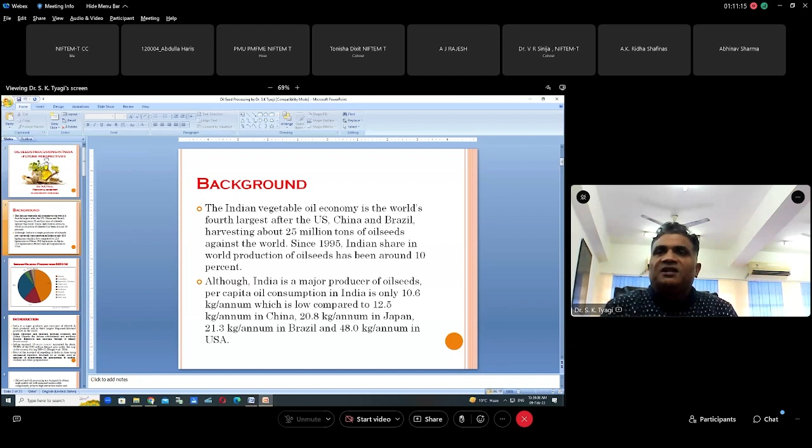Even in Pakistan, the per capita consumption is more than us. In Indian oilseed production, on a 2013-14 basis, 44% is soybean, then groundnut, and 29% is mustard or rapeseed. In northeast or northern India, people like to consume mustard oil, and in central India, people like to consume soybean oil, and in Karnataka, Maharashtra, and that region, people consume sunflower oil, and in coastal areas people consume coconut oil. So our requirement is much more than what we are producing, so we are importing oil from other countries. There is always a shortage of oil in India.

India is a major producer and consumer of oilseeds and their products, and is the third largest rapeseed mustard producer in the world. Major rapeseed and mustard growing countries are China, Canada, the Indian subcontinent, and Northern Europe. Rapeseed and mustard belong to the family Brassicaceae. Indian mustard accounted for about 75 to 80% of the 5.92 million hectare area under the crop in the country during 2011-12. Most of the mustard oil expelling in India is done using mechanical expellers. Mustard oil is widely used as a medium for preparation of pickles, chutney, and other preparations.

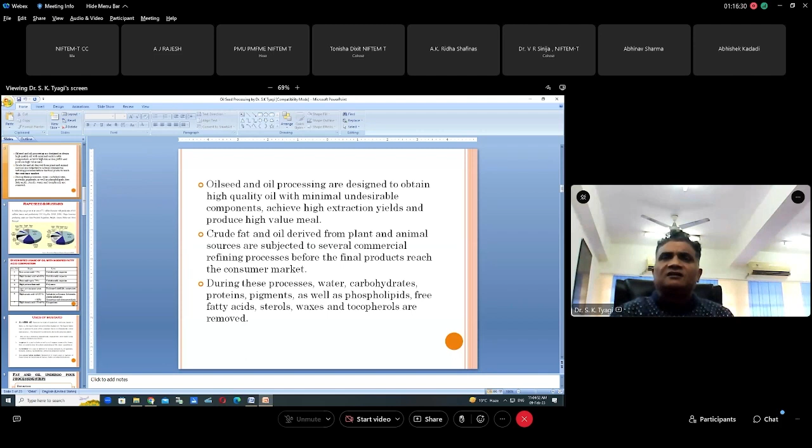I will also discuss the shortcomings, advantages, and disadvantages of extraction through solvent extraction. Suppose we are talking about rapeseed and mustard.

In India, around 7.3 million hectares and 6 million tons, with productivity around 931.5 kg per hectare, are obtained in Uttar Pradesh, Rajasthan, Punjab, Assam, Bihar, and West Bengal. So this is the statistical representation of the production of rapeseed and mustard in India.

As a thumb rule, the diversified usage of oil with modified fatty acid composition: zero erucic acid oil is one having less than 2% erucic acid, and its use is nutritionally superior. If it has high linoleic acid, around 40 to 50%, it is also said to be nutritionally superior. If oleic acid is up to 70%, this oil is also nutritionally superior.

High linoleic acid, up to 40 to 55% or greater than 80%, is used for industrial polymers, lubricants, plastic industries, cosmetics, and pharmaceuticals. High stearic acid is used for margarine. So there are many uses, some industrial, some edible purposes.

During refining, we extract some byproducts, and these byproducts are used as raw material for making certain other industrial products.

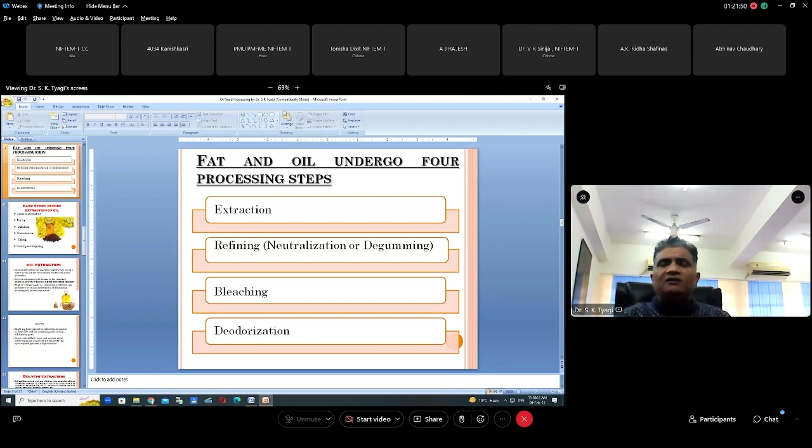And for this, either we have to produce much more oil seed in the country, or we have to go for a very special treatment of the oil that is fit from a health point of view.

Basic steps before extraction of oils are cleaning, drying, dehulling, size reduction, flaking, cooking and tempering. It depends from seed to seed. Suppose we are going to extract the oil of groundnut, then we have to give some heat treatment prior to extraction, and different types of oil seeds need special treatments for extraction of oil in a better way.

Oil extraction: solvent extraction and mechanical extraction are two common oil seed extraction processes, and in many places a combination of these two is used. If the oil content is more, first mechanical extraction is done, and then subsequently solvent extraction is done. If the oil content is low, we can go directly for solvent extraction.

From a theoretical or academic point of view, the supercritical carbon dioxide extraction method is also used, but it is used for oil seeds with very small oil content, like turmeric oil or mango kernel oil. So for extraction we can go for supercritical carbon dioxide extraction technique, but this is very costly and is not used for cooking oil purposes.

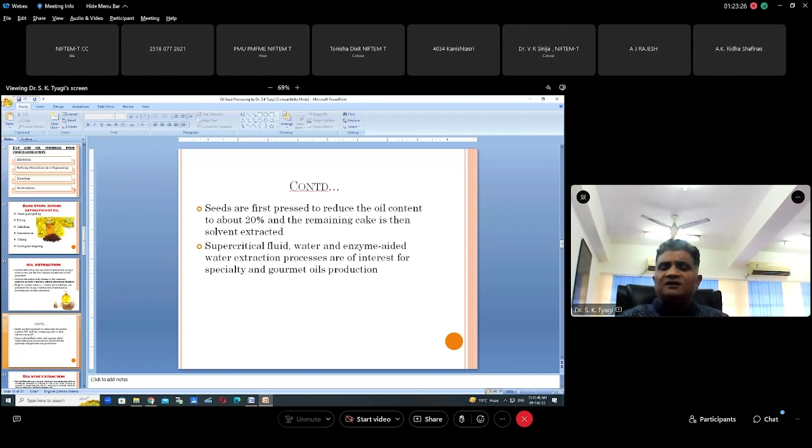On the basis of the seed, we can go for special treatments. That may include some enzyme-aided treatments, some water extraction techniques, some chemical treatments, some steam treatments. There are so many pre-treatment techniques available.

As I have already discussed, solvent extraction is done by either petroleum ether or hexane for different oil seeds. And the refining, as already discussed, is done for removing the free fatty acids, and these are multiple steps, either one step or two steps we have to go for. So I am not going into detail on that.

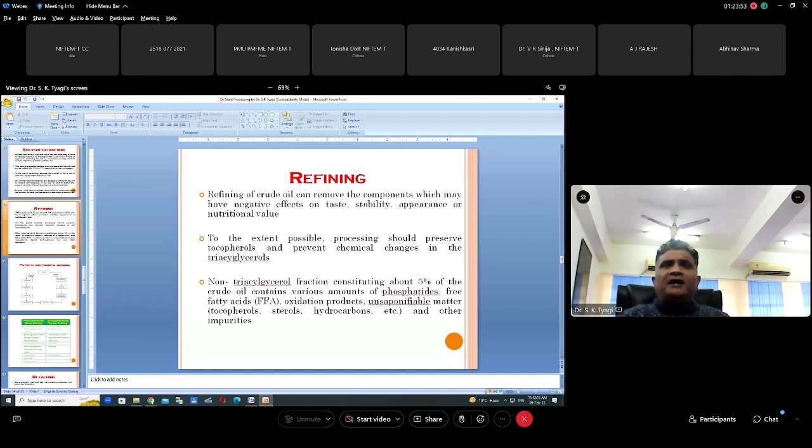There is physical and chemical refining. In chemical refining, we treat it with alkali, and in physical refining, we go with steam treatments. On the basis of temperature, we can remove so many aromatic compounds, and that is in the form of degumming. This step, physical refining, is nowadays more accepted, so that we at least get rid of one step of chemical treatment.

Physical refining, or steam refining, is one part; chemical refining, or caustic refining, is another. So we can have the comparison of these two: in degumming, removing phosphatides through enzymes here, and degumming with the help of phosphoric acid there. Then bleaching, that is color removal through activated bleaching earth.

Neutralization with caustic is done for removal of free fatty acids. This is followed by dewaxing, filter pressing, and bleaching. In steam deacidification, free fatty acids are also removed.

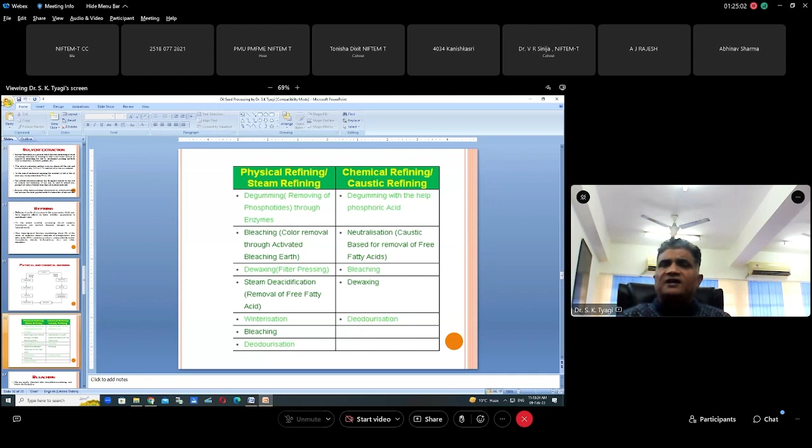This has also been discussed. Dehulling of mustard seed is one of the operations. This mustard oil is preferred for its pungency and is much liked by people in the northern and northeastern parts of the country because of the presence of hulls in the seed coat, which imparts color to the oil and also a major part of pungency due to bitter compounds present in it.

A need has been felt to dehull the mustard seed before extracting its oil. This technique was developed at CIPHET Ludhiana. Here we remove the hull first, and it has been observed that after dehulling the seed, it is possible to convert the non-edible oil cake, mostly used as animal feed, into an edible one, and also derive many other byproducts from the cake. It was considered desirable to develop a low-cost, low-energy process for dehulling the seed.

We worked on that and obtained several patents for dehulling the mustard seed. We extracted this bittering compound from the mustard seed and developed many products with it, and now many of them have been commercialized and are very much in the market.

If we want to reduce the cost of the oil, we have to focus on the byproducts obtained from mustard and other oilseed extraction techniques. If we can develop innovative products from the byproducts of the refining process, only then can we provide a cheaper version of oil to the country's people, and that would be a breakthrough. That is the requirement of the hour.

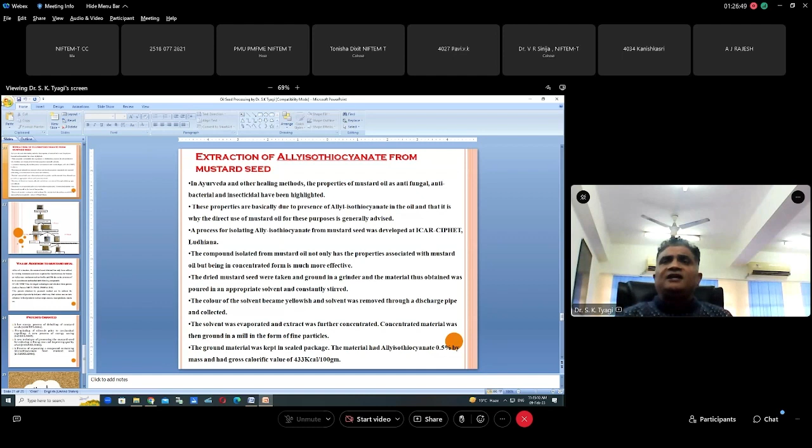You can see at the top the whole mustard seed, which we ground. Then we separated the mustard hull from this and obtained dehulled mustard powder. We got our first patent on this, developing a technique to dehull the mustard seed and remove the mustard hull.

From dehulled mustard powder, we extracted mustard oil and allyl isothiocyanate, and produced de-oiled, defatted, dehulled mustard flour having 47.8% protein. We got a second patent on this, and a third patent for extraction of allyl isothiocyanate.

From the de-oiled, defatted, dehulled mustard flour, we obtained a protein isolate that is 99% pure, a hydrolyzed plant protein. We developed biscuits, breads, and various other food products with this de-oiled, defatted, dehulled mustard flour, which is now very much in the market and a very famous product.

We published a paper on this, which has very good citation in the world. Also, after extracting the protein isolate, we extracted fiber from this de-oiled, defatted mustard flour.

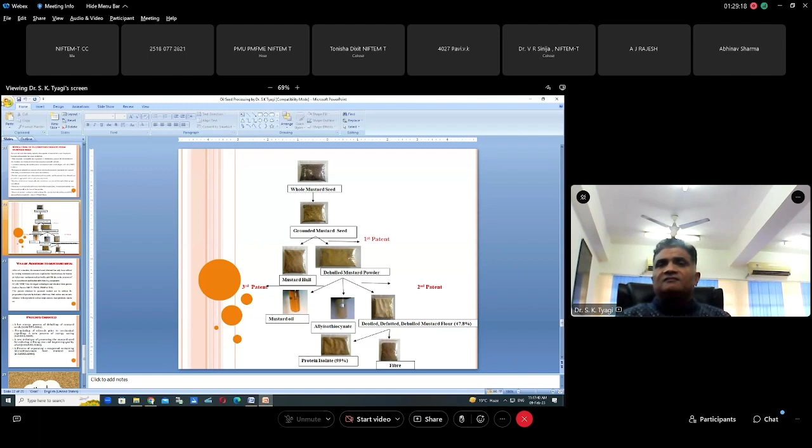So nowadays, friends, it is time to focus on value addition, to develop innovative products from the byproducts obtained during refining or extraction of oils. The time has gone when we just used oil as such and the cake only for animal purposes. We have to focus on developing innovative products from the byproducts obtained during the refining process. This is the requirement of the hour.

After oil extraction, the mustard meal obtained has only been utilized for feeding ruminants and is not exploited for food or feed uses for humans and non-ruminants such as broilers and fish, due to the presence of toxic constituents and undesirable bittering compounds.

ICAR-CIPHET has developed technologies and obtained three patents on this. The protein obtained by this patented method can be utilized for preparation of protein hydrolysate, which may find various uses as a taste enhancer in food products such as soups, sauces, meat products, snacks, etc.

We obtained these 4 patents. One is low energy process of dehulling of mustard seeds, pre-grinding of oil seeds prior to mechanical expelling - a new process for energy saving, a new technique for processing mustard seed for reducing refining cost and improving quality of oil, and a process of separating a compound containing allyl isothiocyanate from mustard seed. So these are the things which we have done so far.

With this, I hope that we can focus on other oilseeds also, because there are so many innovative products that can be developed even from cottonseed oil. Cottonseed is mainly used for making bakery products. In bakery products, cottonseed oil is used because it has no grease type of materials - it gives crispiness to the bakery products.

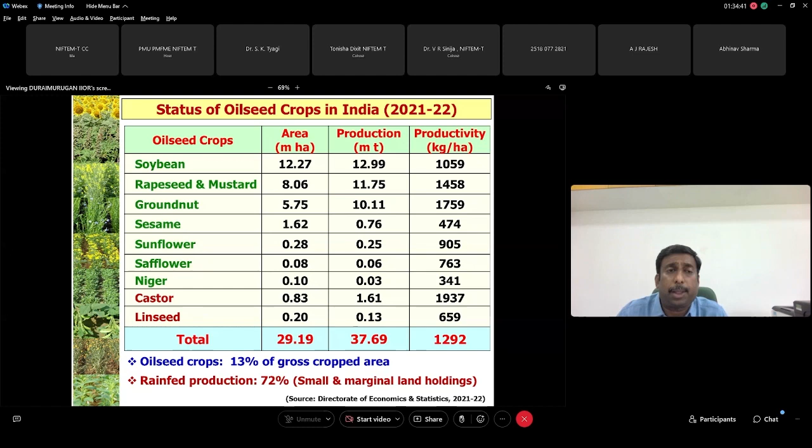These 9 oilseed crops are cultivated in about 29 million hectare area with a production of 37 million tons. But 72% of these oilseed crops are cultivated under rainfed ecosystem, especially by small and marginal land holdings, so productivity is very low - about 13 quintal per hectare compared to cereal crops. Looking at production contribution, only 3 oilseed crops - soybean, rapeseed, mustard, and groundnut - contribute 89% of the production.

Looking at different states contributing to oilseed production, only 4 states - Madhya Pradesh, Rajasthan, Maharashtra, and Gujarat - contribute almost 75% of the production. In addition, groundnut and sesame seeds contribute a large share in exports. Annually, we earn foreign exchange of almost 9,000 crores. This is the status of oilseed crops in India.

Coming to post-harvest losses, which includes from harvesting operations to storage - based on recent reports and literature, post-harvest losses, including storage losses, range from 2.3 to 10% in different oilseed crops, which is equal to almost 2.2 million tons. Based on the latest production and minimum support price, we calculated the economic value, which was found to be almost 10,000 crores.

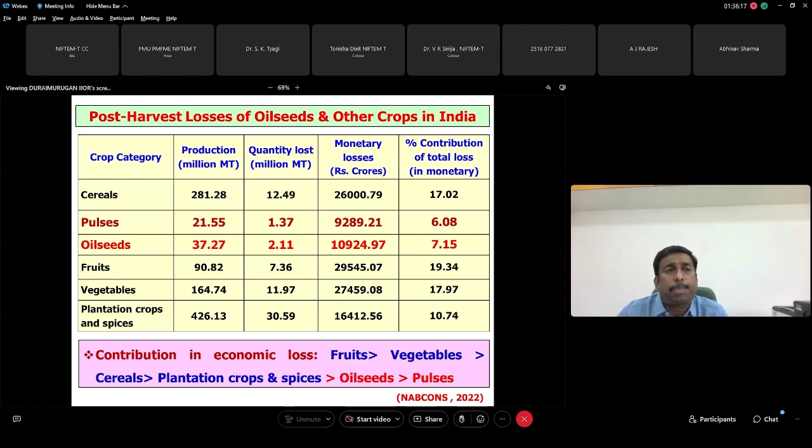This is the post-harvest losses occurring in oilseed crops, including storage losses. Based on NABCONS report, post-harvest losses in oilseed crops are lower than cereal crops and horticulture crops, but higher than pulses, so we have to focus more on oilseed crops as compared to pulse crops. Looking at losses occurring in different post-harvest operations at the farm level, from harvest to storage, the major contribution is from harvesting, threshing, and collection, followed by cleaning and storage. Storage contributes 0.22% of the total post-harvest loss of 4.26%, meaning almost 5% losses occur in post-harvest operations.

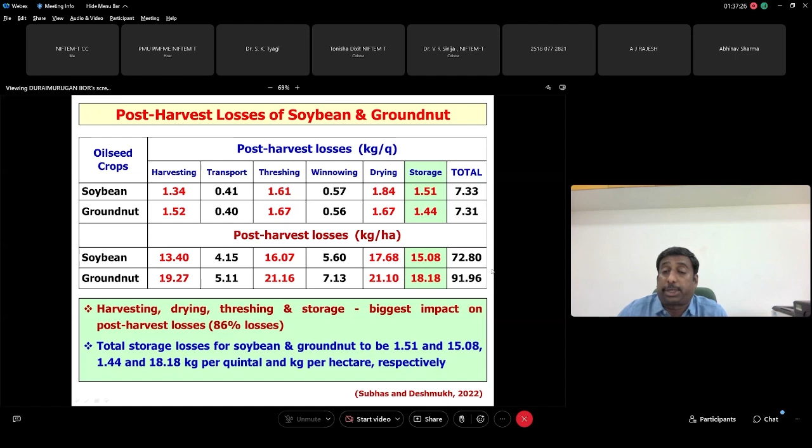This is important in case of oilseed crops. In one of the recent research papers, you can see especially soybean, groundnut, and sesame are highly susceptible in storage conditions, and there are a lot of losses occurring during storage. Almost 1.5 kg of soybean and groundnut seeds are lost per quintal, equal to 15 kg per hectare of soybean and 18 kg per hectare of groundnut. This is the biggest impact among the post-harvest losses in these three oilseed crops.

So what are the reasons, the causes of storage losses in these oilseed crops? There are almost 6 insect pests and mold growth, which are major factors contributing to the post-harvest loss, including storage losses, mainly in these oilseed crops. We will see one by one now.

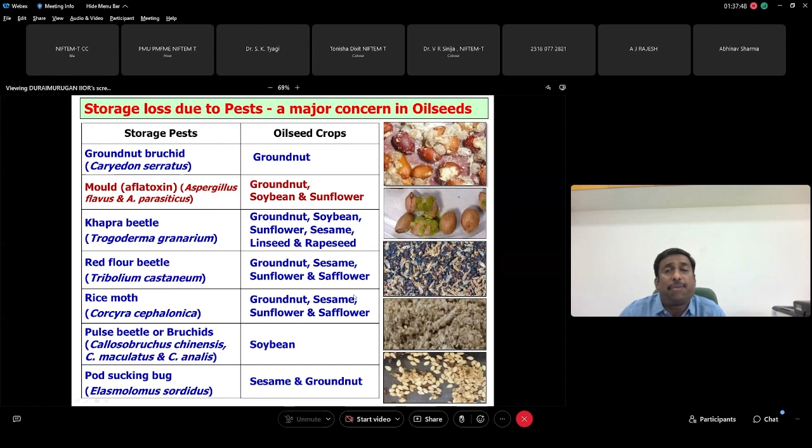If you see the groundnut crop, 65% of the produce is stored up to 9 months, either as unshelled pods or kernels, by the farmers, especially for seed purpose, for the processors, for oil extraction and confectionaries, and similarly by the exporters for export. In many cases, a storage loss of 10 to 25% was reported, especially due to insect pest and mold growth, and also due to rodents.

In addition, there are many export rejections, especially in groundnut, because of infestation due to groundnut bruchid and aflatoxin contamination. The groundnut bruchid is a serious storage pest of groundnut, not only in India but in other parts of the world also. It damages both the kernel and the pods, feeding on them internally, which results in increase in temperature and moisture, which favors the growth of aflatoxin. Secondary pests like rice moth and red flour beetle also cause this damage.

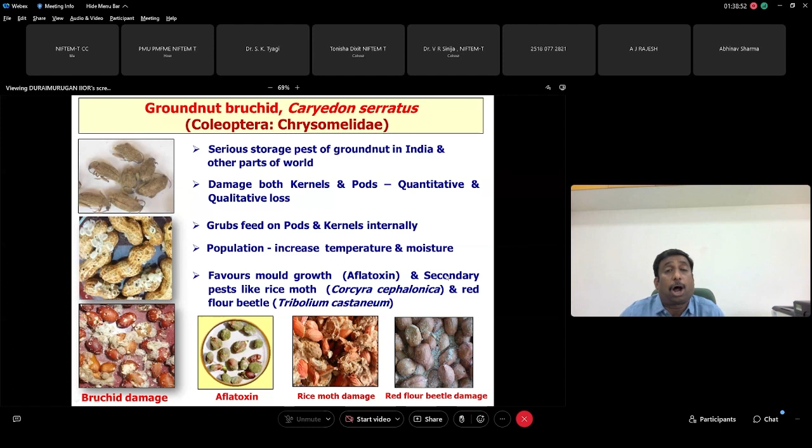Another important one is aflatoxin contamination in groundnut. Though it occurs in other crops also, it is a major problem in groundnut. These aflatoxin producing fungi, Aspergillus flavus and parasiticus, colonize and contaminate the kernels. These contaminations occur especially during the pre-harvest time, field drying time, curing time, or during storage time. It leads to deterioration in both the quantity and quality of the groundnut, and also its products like oil and cake, which is highly harmful to human beings and also for animal health when the cake is fed to the animals.

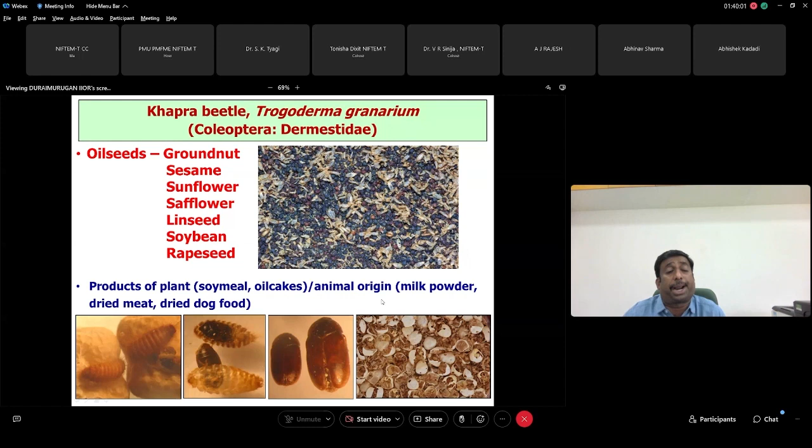Another important pest is the khapra beetle, especially in North Indian Peninsula. It's a major problem in almost all crops, from groundnut, sesame, sunflower, safflower, linseed, soybean, and rapeseed mustard. This causes export rejections due to the presence of this insect pest in mustard. In addition, it also attacks products like soya meal and oil cakes. It's a general feeder that also attacks milk powder, dried meat, and dog foods.

Another important one is the red flour beetle. In recent years, especially in sesame, we are recording more damage due to this pest, especially in white-seeded sesame. As compared to black and brown seeded sesame, these white seeded sesames are highly susceptible to storage pests, especially this red flour beetle and rice moth. In addition, it also attacks the groundnut crop.

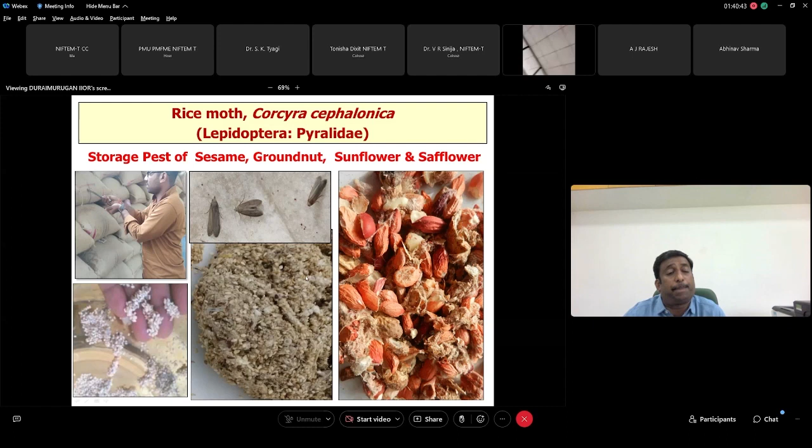Another important problem is the rice moth. It is a polyphagous pest that attacks many cereals and other crops, including oilseeds. It attacks sesame, groundnut, sunflower, and safflower. You can see the damage here. Especially in recent years, there is a lot of damage in white seeded sesame by this moth.

Another important one is the bruchid, also called pulse beetle. In addition to pulses, especially in soybean, it's a major problem and it damages the entire produce, sometimes up to 100% damage under favorable conditions. That produce will not be suitable for seed purpose or for consumption by human beings and animals. So this is also one of the important pest problems during storage.

In recent years, we are getting more problems, especially due to the sesame seed bug, also called pod bug. This is the pod bug. You can see here, this is sesame seed harvested and occurring in the threshing floor. These are the bugs, you can see how many numbers of bugs are damaging the seeds. It causes both qualitative and quantitative losses, leading to reduction in oil content and also weight loss. In some cases, it also attacks sesame and groundnut.

Not only in the threshing floor, even in harvesting and after storage, insects attack the sesame and groundnut crop, leading to shriveling of the seeds which become unfit for consumption, and the oil content is also reduced. This is another major problem in storage.

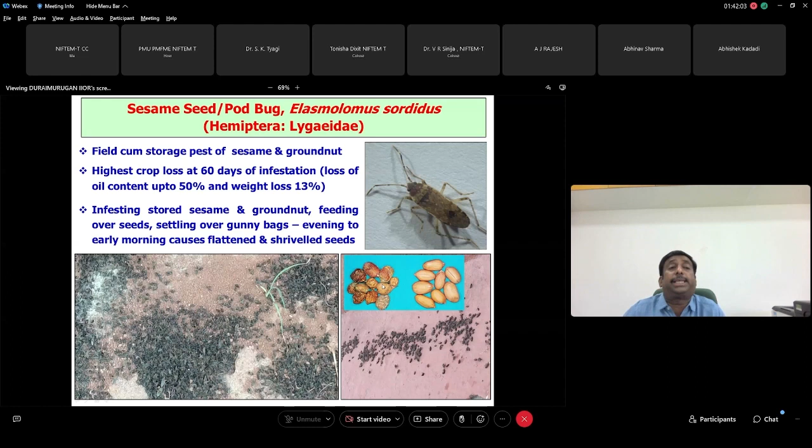So now we have seen the reasons for the problems, what are the problems in storage. Now we are going to the technology to reduce the storage losses in oilseeds.

Especially, most of the storage problems initiate from the field. So we have to take care of the field operations, especially harvesting. Harvesting at the right time, at the right maturity stage, is very important in oilseed crops. And especially during harvesting, we have to avoid damage to the pods, which leads to a lot of contamination by insect pests and also mold growth.

So we have to avoid heaping the produce in the field, especially for long days, as that will cause a lot of insect infestation and mold growth. Similarly, the harvested produce should immediately be dried properly. For example, in groundnut, you can use the inverted windrow method immediately.

Similarly, especially for groundnut, heaping near the alternate host should be avoided. So immediately after harvest, it should be properly threshed, dried, and packed. Otherwise, the alternate host, especially groundnut bruchid, contaminates from the trees to the harvested groundnut produce.

Similarly, avoid carryover of pests from the field, like pulse beetles, pod bugs, and the painted bug in mustard, especially rapeseed mustard. This carryover of pests from field to store means even less than 1% damage in the field can cause 100% damage in storage. So we have to take care of proper management practices at the pod maturity stage of oilseeds, which will greatly reduce the loss in storage.

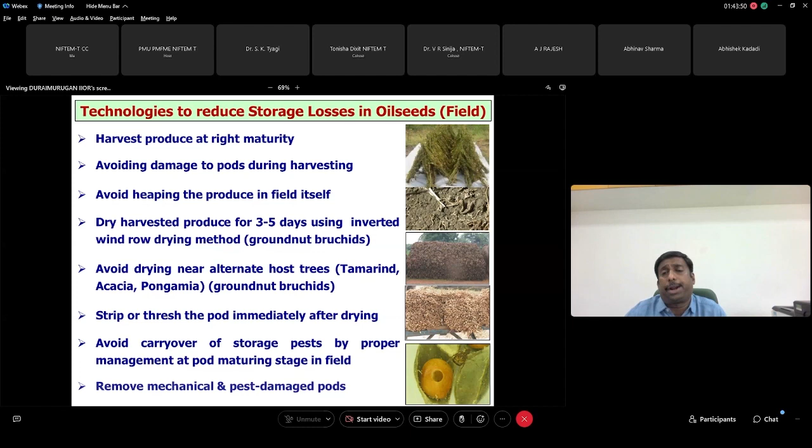Actually, compared to other crops, manual harvesting and other operations are more common in oilseeds, which causes a lot of damage to the pods. The mechanization level of oilseed crops is only 20 to 30%, based on the latest report. Harvesting and threshing in oilseeds is only 20 to 30%, as compared to 80 to 90% in cereals.

So we have to encourage mechanization in oilseeds, especially combine harvesters, which are commonly used in crops like soybean, safflower, sunflower, and now even mustard has been recommended. These combine harvesters, threshers, and dryers should be encouraged among farmers, which will greatly reduce the loss in storage conditions.

Similarly, the major problem of insect pests and other quality or quantity loss in storage is due to inadequate drying. This is very important. Inadequate drying leads to insect infestation, fungi, moisture, which results in overheating, discoloration, and complete deterioration in the quality of the oilseeds and their products.

So we have to use dryers. There are several solar-operated dryers available nowadays that can be encouraged among farmers to reduce the moisture content in the harvested products.

Similarly, for groundnut kernels and pods, 4 to 6% moisture is recommended for kernels, and 7 to 9% moisture content for pods, before storage, and it should be properly monitored. Similarly, for other oilseed crops, less than 8% moisture should be maintained, and we have to remove broken and damaged seeds, which are favorable for the growth of mold and insect infestation. This is a very important practice.

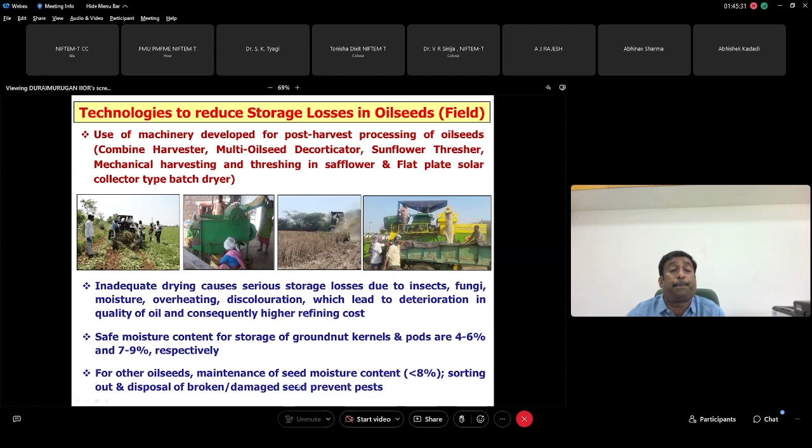So these are some of the mechanization practices we want to encourage. This will greatly reduce post-harvest losses and also reduce storage losses by avoiding damage to the grains and seeds.

Combine harvesters, soybean reaper binders, decorticators, threshers, and oilseed dryers are available. Even solar bubble dryers are available. These can be encouraged among farmers, either on a community basis or village level basis, which will greatly reduce storage losses in oilseed crops.

So coming to storage conditions, what are the technologies? The first important one is the disinfestation of storerooms. Actually, the godowns or wherever you are storing, especially high-risk areas like cracks in the walls and floors and low-light areas, need to be properly checked and disinfected. That will make a lot of difference in reducing losses in storage.

That is a basic step, but it's very important one. Similarly, use of clean storage bags, avoiding the use of very old gunny bags or jute bags, that should be avoided. And if possible you can expose them to sunlight for a couple of days before storing the oilseed. That is very important.

Storing of old or infested stocks in godown along with the newly harvested one creates a lot of cross contamination, so that should be prevented. Whenever storing, we have to allow proper ventilation and space for inspection. That is a basic step that is very important to reduce and monitor the storage loss in oilseed crops.

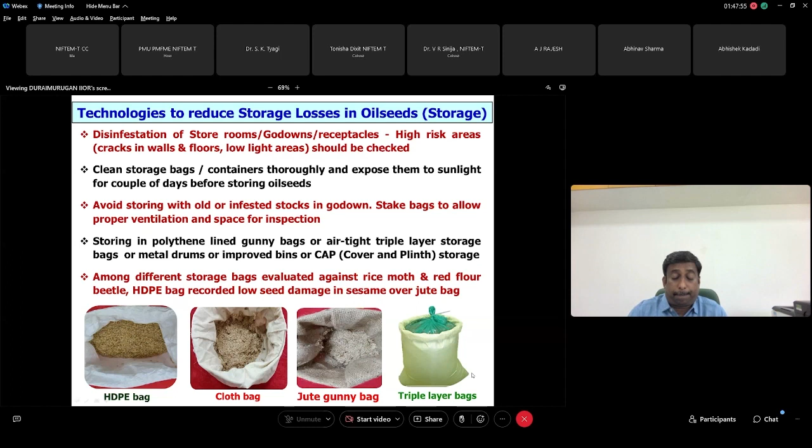Coming to another important one, especially for long-term storage or export purposes, these physical or cultural methods are very important. Nowadays hermetic storage or modified atmospheres are very popular, like super bags, cocoon storage and silo bags. That can be encouraged among farmers and also at the market level channels to reduce the loss in oilseed crops. In addition, airtight storage, sealed structures like super bag, cocoon storage and silo bags are very good in conserving quality and reducing losses due to insect pests and mold growth.

In addition, controlled atmospheres like use of low oxygen and high carbon dioxide are lethal to all insects, which can be promoted for export purposes, especially for storing near the harbors. That will prevent export rejections in foreign countries due to insect pests and fungal growth.

Similarly, temperature control. Temperature plays a major role. The insect pests will not develop below 15 degrees Celsius and also above 42 degrees Celsius. So heating of the seeds to 50 to 60 degrees Celsius for 10 to 20 minutes kills all the pests. This can be followed on a large scale, especially in large bulk storage of oilseed crops used for oil extraction.

Similarly, another important one is regular monitoring and early detection of infestation. Very important. As I told, very low infestation of less than 1% will give potential risk in storage. So we can monitor using it. There are a lot of pheromone traps now available for storage pests, and light traps, pitfall traps, probe traps. Even recently, e-nose detectors are also available that can be used for timely monitoring and management of initial infestation. That will create a lot of reduction in storage losses.

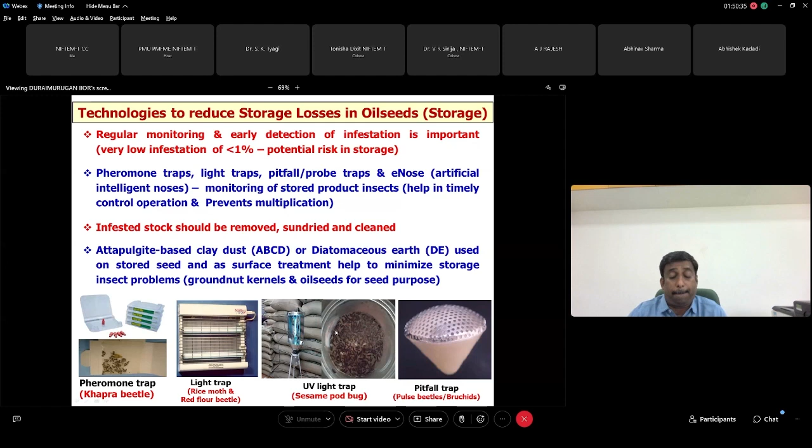Another important one is the use of different edible and non-edible oils, especially at the rate of 10 ml per kg seed, which can be used effectively against storage pests. Especially groundnut pods, when treated with neem seed kernel powder at the rate of 10 gram per kg, or neem oil 5 ml per kg, or pongamia or castor oil 10 ml per kg, or kernels treated with neem leaves 50 gram per kg, are effective against groundnut bruchids.

Similarly, for sesamum, we found that seeds treated with neem leaf powder 25 gram per kg, or neem seed kernel powder 10 gram per kg, or sweet flag rhizome powder, that is Acorus calamus, 10 gram per kg, are effective against stored pests.

This can be used for storing the seeds, especially for next season sowing. There are several biopesticides, especially different strains of BT (Bacillus thuringiensis), that can be used for management of moth pests and also some of the beetle pests.

Whenever you use an insecticide, we should know the label claim of the insecticide approved by the Government of India, and only then should you use it. For seed treatment, deltamethrin is recommended, and similarly for fumigation, aluminum phosphide is approved under the CIBRC label claim that it can be used.

Some of the recently developed eco-friendly biorational insecticides like spinosad, methoprene, and hydroprene are registered as grain protectants in USA, but in India they do not have a label claim. These are all found effective for storage pests. These are biorational, synthetic analogs of natural products that can be used for management of storage pests.

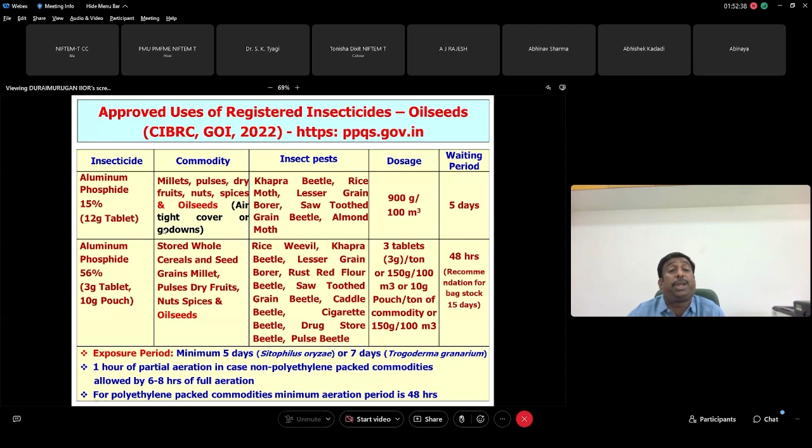This is the CIBRC website. Aluminum phosphide is permitted for oilseed crops, in addition to other oilseed products that can be used for fumigation as per the recommendation by the Government of India, and it may be updated every year by checking the CIBRC website. So only label claim insecticides and fumigants should be used for management of storage pests in oilseed crops.

Fumigation is highly toxic, so it should be performed only by certified specialists. Proper arranging of seeds, creating airtight conditions, and measuring the concentration before and after fumigation is very important. It should be strictly undertaken with a specialist to reduce storage losses in oilseed crops.

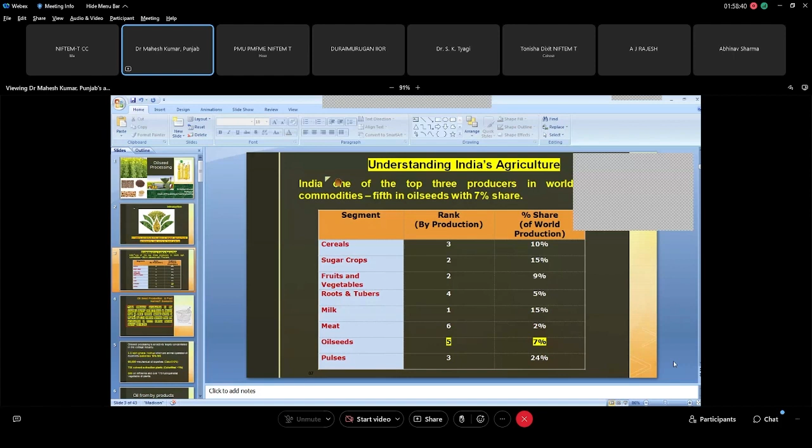So the field is, I will be discussing the oilseed processing as well as the milling machinery involved. We all know, as we've been listening throughout the day, that oilseed is the second largest commodity next only to food grains. If you look at the total Indian scenario, we are very good as far as the production of food grains is concerned in the country, so agricultural scientists have performed marvelously well. But in case of oilseed, our total rank in the world is fifth, with a total share of only 7%. But we are growing.

For the last few years, our production of oilseed has been rising in the country. Can you make it full screen? Okay, ma'am. So now food oilseed production has been increasing as per our demand.

If you look at the scenario of processing in the country, it is more or less considered as a cottage industry. We have a huge amount of ghanis operating in the country, but the oil left in the de-oiled cake is quite high, 15%, with this technology. Even though people prefer the oil extracted through the ghanis, primarily because they consider it as cold pressed oil, the total oil could not be expressed through these units.

Now we have more than 60,000 mechanical oil expellers. It is a better technology than the ghanis, but still 6 to 8% oil is left in the de-oiled cake. Since our country is deficient in oil, that is still very high.

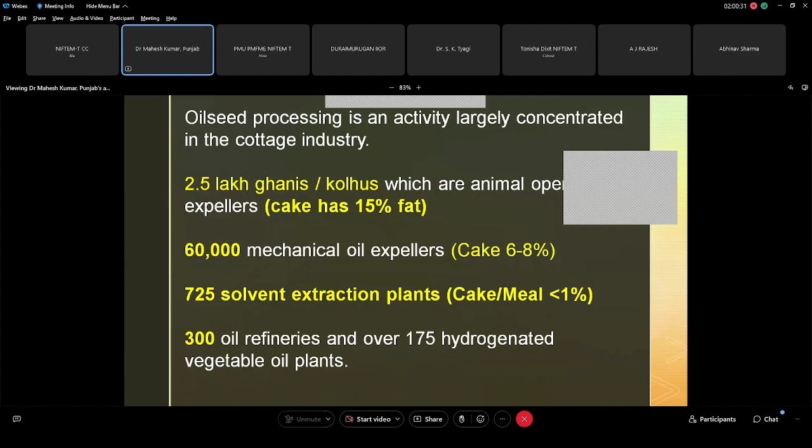So we have to resort to solvent extraction plants using hexane, etc., where the meal or the de-oiled cake has less than 1% oil left in it. Then there are 300 oil refineries and over 175 hydrogenated vegetable oil plants in the country. We also get oil from agricultural processing byproducts like rice bran and maize germ.

As far as the overall situation is concerned, especially in the northern part of India, we give more preference to mustard oil. 90% of the total agricultural production of mustard and rapeseed, including canola, is crushed for extracting edible oil. In fact, two-thirds of the edible oil consumption in the country comes from this category of crop, that is mustard. Canola is a recently developed oilseed variety of mustard, which has less than 2% erucic acid, and its de-oiled cake has less than 30 micromoles of glucosinolate per gram of de-oiled meal, which is a bit of a toxic material.

Physically, oilseed composition can be considered as a mixture of oil, meal, basically composed of proteins, and water. When we talk about processing, this means we wish to remove most of the oil to get the de-oiled cake. The de-oiled cake will contain residual oil as well as some amount of water. But since de-oiled cake is a very good source of protein, it is generally used for animal feed purposes.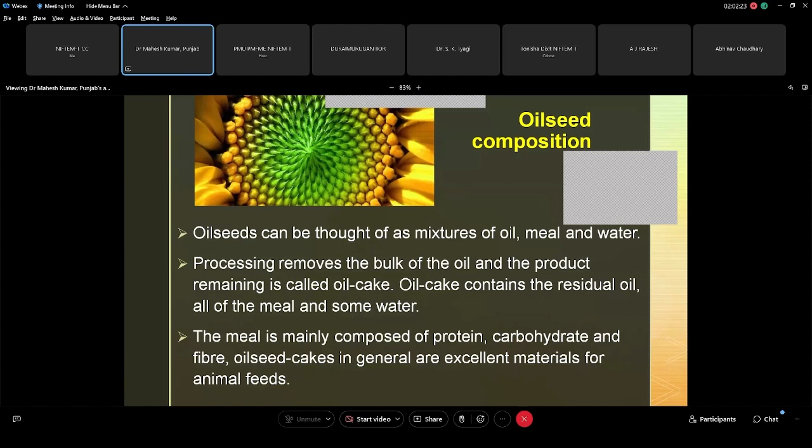Every grain, if it has to be stored, has a maximum moisture content limit for safe storage. Same here also, but we eventually have to store the seeds, whether oilseed or any other food grain, primarily because they are available once or twice a year but needed throughout the year. Moisture content in the oilseed is not only important for storage, but also for expressing oil out of the oilseed. If moisture content is not controlled, there is every chance of microbial growth. So as a thumb rule, when we teach students, we consider 10% moisture content safe for storage of most food grains.

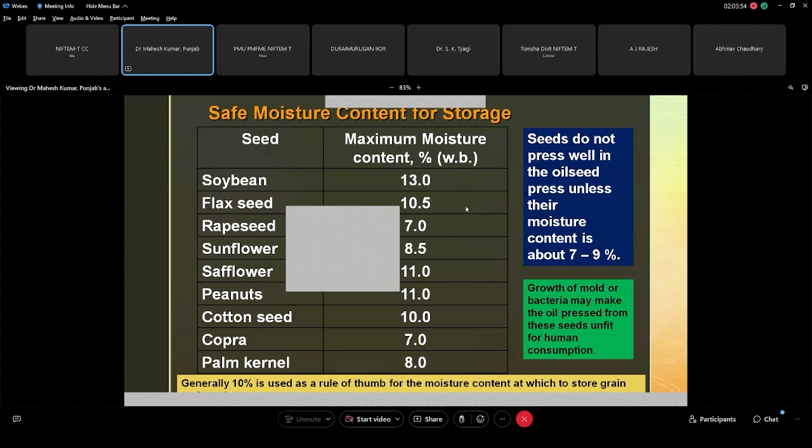But when processing the seed grains for oil expelling, moisture should be 6 to 8, 7 to 9%. Previously, post-harvest losses were discussed for oilseeds, but in case of mustard it is about 9%, which includes losses in the supply chain also. Even though storage losses are not that much, because of handling, transportation, logistics, etc., there are losses in different types of oilseed grains ranging from 3% to 10%.

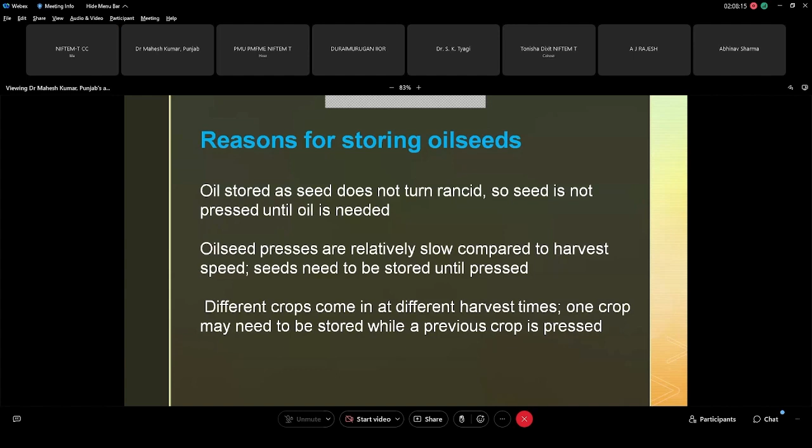Now why do we need to clean? In any processing job, the first step is cleaning, grading, sorting. Weed seeds like argemone, which are present at the time of harvest, may interfere with the extraction of oil during the expulsion process, adding unwanted taste or chemicals to the expressed oil. Moreover, if the seeds are dirty and contain abrasive clay parts or abrasive materials, that will cause more wear and tear of our expelling machine. So there are physical hazards presented by uncleaned grains.

As far as the processing steps are concerned, it is very simple. We need to store the grain. Cleaning after storage or cleaning before further processing is a matter of choice. Some people, when it is stored in bags, clean before operation.

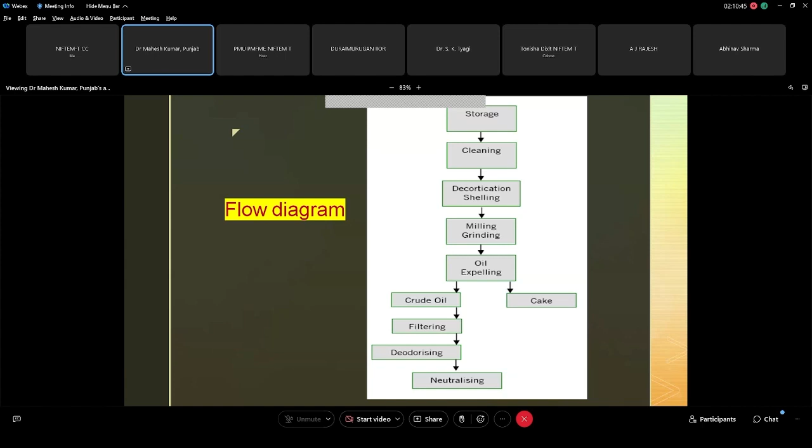Neutralizing means the removal of free fatty acid, which usually is not performed at small scale. There are a number of options available that have been developed over time, starting from the bullock-drawn kohlu or ghanis. Now we have power-operated ghanis, and mechanical expelling units of different capacity.

The amount of oil extracted depends upon the setting of the machine, the screw speed, and the space left between the tip and the barrel itself. So we have adjustable tip diameters and variable speed drives. Both of these, in combination, can give an optimized oil extraction.

One of the important things while extracting oil is that if the oil seed is too dry, we won't be able to get easy and good quantity of oil. The reason could be that the oil mill will get heated up. Usually there is a concept of cold pressed oil, so that purpose will be defeated - we won't get oil, and temperature will be on the higher side.

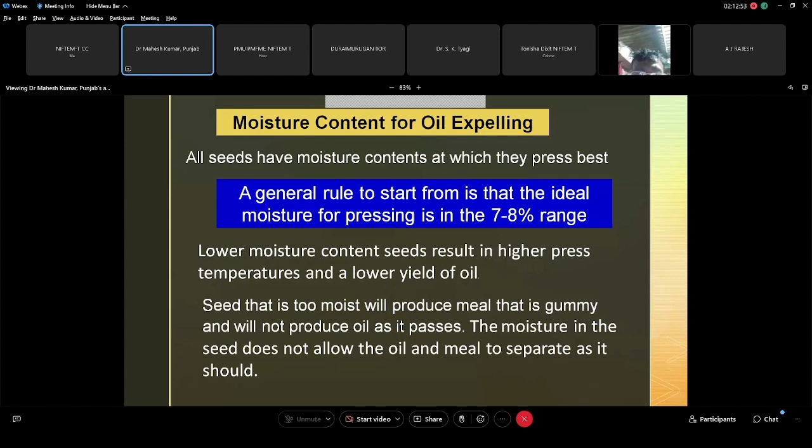As discussed earlier in our diagram, after removal of oil through the oil expeller, which is mechanical in nature, the oil goes into the pressed oil tank. Due care should be given to this tank. First, it should be stainless steel or food grade plastic material. Iron, aluminium, copper need to be avoided because these metals help in the oxidation of the oil. There should be a smooth surface, but it should not be considered an unimportant component. Pressed oil tank is important for any food item. We should try to use stainless steel as a safety measure.

As already discussed, the oil after extraction is not totally separated. It contains suspended particles which we call foot, that need to be removed. The usual practice followed here in Punjab is sedimentation. We allow the oil to settle in the press tank itself, so the oil remains in that tank for more than 24 hours. Therefore, the material of construction of that tank is very important.

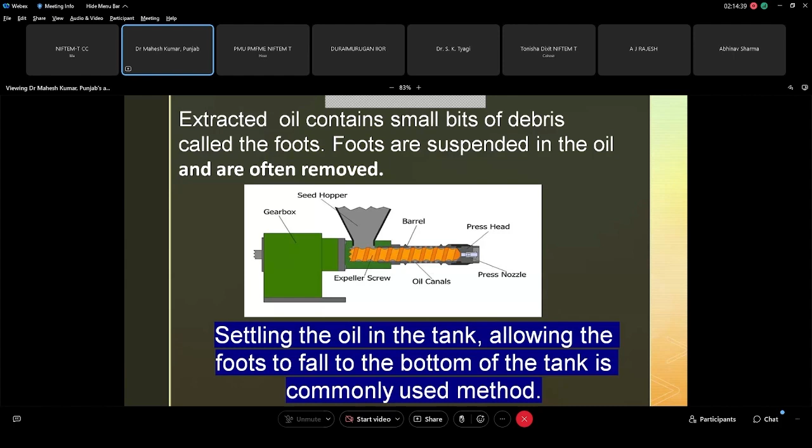After sedimentation or settling of the foot or debris contained in the oil, it is then further filtered through the filter press. With the help of a pump, which is usually not a centrifugal pump but a gear pump or diaphragm pump, the oil is pushed into this filter press, which removes any physical impurity that could not be settled down.

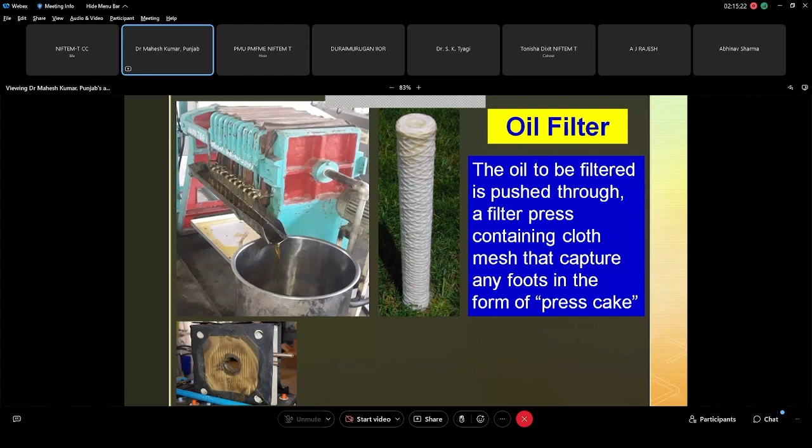Once filtered, the oil is pumped to the clean oil tank, which is basically a storage unit.

Once oil is extracted, there is every fear of it going rancid, especially after exposure to air or moisture. So it is very important, wherever possible, to keep extracted oil away from oxygen. We could use a number of techniques. We can have a tank with a valve attached and flush it with nitrogen, so the oxygen moves out of the tank from the headspace environment. Or we can use a vacuum wherever possible.

There are few constituents in the oil which resist rancidity, like tocopherols or carotenoids, but there are more pro-oxidant components present in the oil, just like water, metals like iron, copper, polar lipids, and chlorophylls. These are the constituents which help the oil get oxidized, so we have to be very careful thereafter.

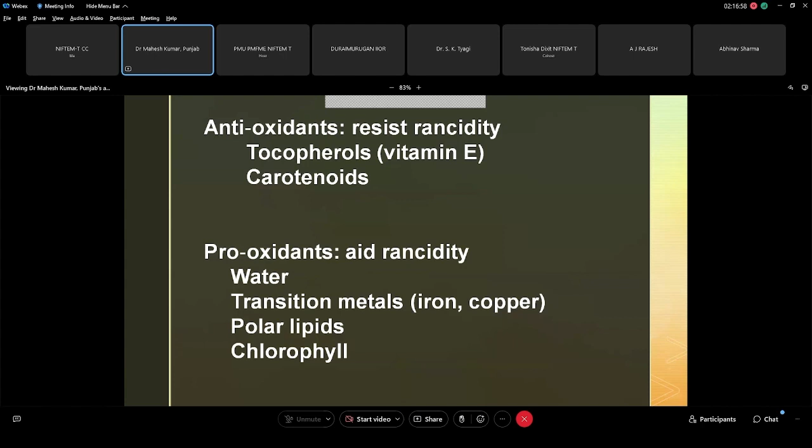When we are working at small scale level, we always prefer a minimally processed oil, because it retains all the flavors, pungency, and aroma, etc.

In our Punjab, we are advocating this concept of agro-processing complex, in which the oil expeller is one part, having a capacity of about 70 to 100 kg of oil per hour. That means we get that much of the product which can be easily distributed in the nearby villages, or easily goes to the consumer readily.

So these are a few examples of what we are doing at our department in Punjab Agricultural University. PAU is promoting canola oil seed, so a few varieties have come up here, and those varieties we procure at our processing plant.

After cleaning, it is expressed in the mechanical expellers. Thereafter we filter it, send it for bottling, and it goes to the consumer at PAU itself, because there are more than 5,000 residents at our campus. The oil cake goes to the animal feed unit in the veterinary university.

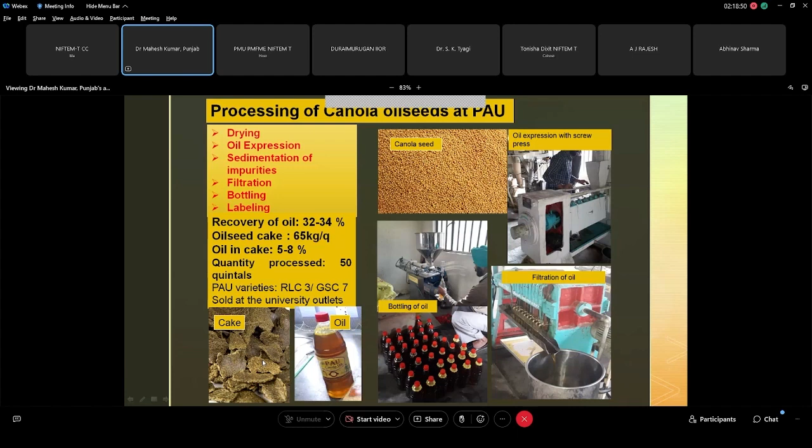So the type of machinery involved is the mechanical oil expeller, a filter press, oil pump, storage tank, and bottling and packaging system. The total cost of plant and machinery, leaving behind the civil structure, is about 5 lakhs.

If you look at the supply chain integrated with the agriculture side, we see the oil seed being produced in the field, and the grain going to the mechanical unit where oil is produced, which is used for food purpose. It is used for cooking or deep frying, but after a few times of usage it becomes rancid and goes for esterification for fuel production, biodiesel, etc. And the meal goes to the animals as feed, and both of these units again contribute to the agriculture.

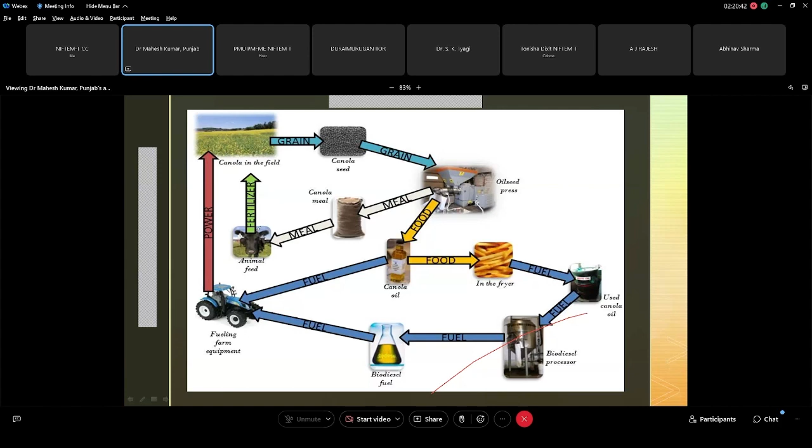Now there is a recent concept of cold pressed oils. This is how advertisers or companies promoting the selling of this edible oil are promoting it. Cold pressed oil means an oil whose temperature remains below 50 degrees during the production process.

While our objective of expelling the oil is to get maximum yield from the oil seed, from the consumer point of view, its temperature should always be lower than 50 degrees centigrade. So oil pressed at a temperature below 50 degrees is termed cold pressed oil, and it is believed to have better nutritional properties.

But one thing I could understand is that it is the phosphorus-based constituent or gummy material which, when it gets into the oil, makes it rancid, even if present in a very minute quantity, maybe less than or up to 1%, which many times may not be helpful in the oil used for consumption. That is why the concept of cold press oil is there.

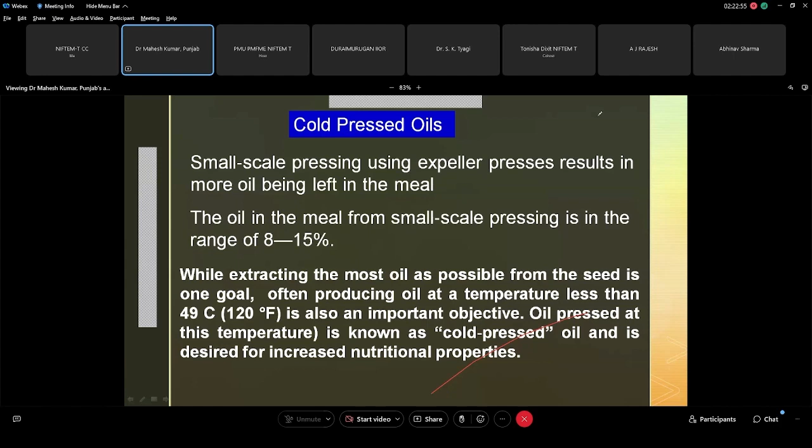Cold press oil means we have to control the speed of our auger so that the temperature is lower. Even though we are working slowly, and the capacity of the system may get lower, at the same time we have to give sufficient time for the squeezed oil to drip out of the machine, and while doing so, the temperature is also contained and not going up.

So the oil which is cold pressed oil is considered to be very nutritional and containing characteristic flavor of the oil seed.

But if I look at the commercial side of it, we usually expel oil in a 3-pass system. First we expel the oil from the mechanical system, whatsoever oil cake is left, it is again fed to the same unit and expelled again. This way we carry out 3 time passes.

The oil expressed at the first time is of better quality, but as they continue to press oil mechanically, there is every chance that some of the gummy or undesirable material is also expelled out of the oil seed, which may not be considered good for the overall quality of the edible oil.

That is why we prefer kohlu, even if more oil is left in the oil cake, because many of the constituents which are not desirable are not present in the first time oil expelled. But still, if you go for the ghani, 20 to 30% oil remains in the oil cake, which is not a commercially viable unit.

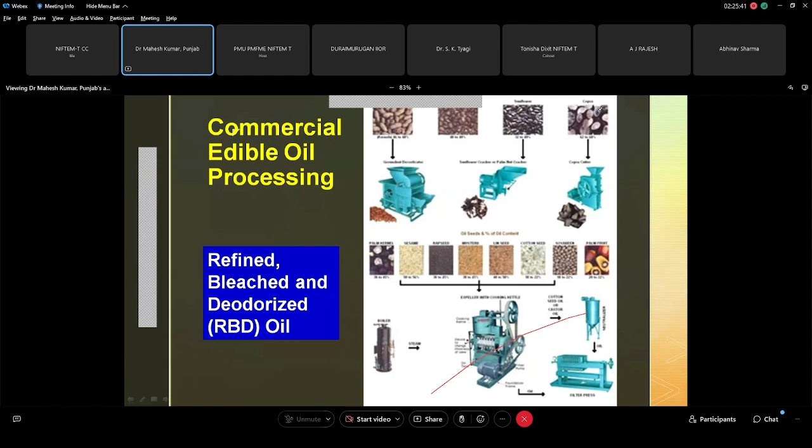So this is all about this small scale operation at the cottage site. Even though we can improve it a little bit by going for some sort of water removal, maybe a little bit of refining. But the commercial edible oil processing is RBD oil - refined, bleached, and deodorized oil. The process is more or less the same.

The only difference is that the processed oil after filtering goes for refining, that is the neutralization of free fatty acid if present. Then it goes for bleaching where the color etc. is removed, then deodorizing, so that oil coming from different oil seeds looks similar. It is tasteless, odorless, and colorless. This is the purpose of this commercial unit.

And whatsoever press cake we get goes for solvent extraction so that the oil in the oil cake is kept to a bare minimum of 1%. So RBD, refined, bleached and deodorized oil, is tasteless, odorless, colorless, regardless of the oil seed from which it is expressed.

As far as refining is concerned, these are things which we need to introduce to our small scale cottage industry also. Basically neutralization of the fatty acid, usually with the help of some alkali. So we need to look at an alkali which is part of our food chain, if possible.

So we should always try to devise our process, to modify the cottage industry so that some sort of neutralization of the fatty acids happens. Especially we are interested in the removal of phospholipids. This is the chief villain as far as this cottage industry is concerned.

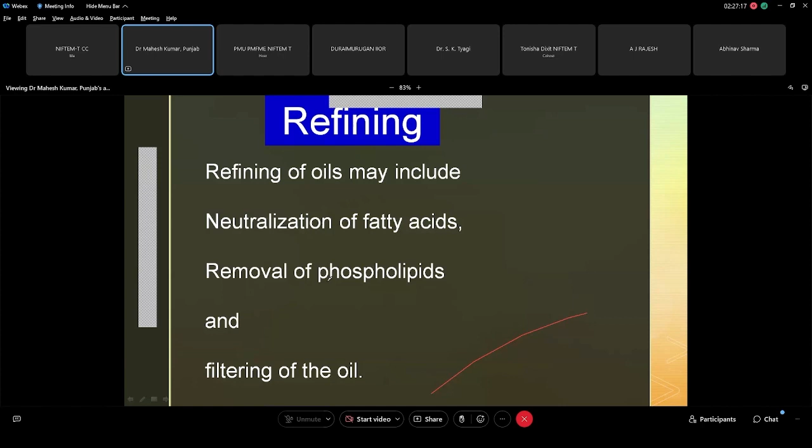Then bleaching means we have to remove any sort of color from the oil. Whatsoever oil we get from the grocery shop, it is primarily because of the choice of the consumer that they want colorless oil. Therefore, oil needs to be bleached, and a type of clay is used for the bleaching of the oil.

So bleaching removes oil components that increase oxidation. Bleached oil can be used for a longer duration of time before this. They can be easily used for deep frying also before undesirable characteristics like off flavor or dark color happen.

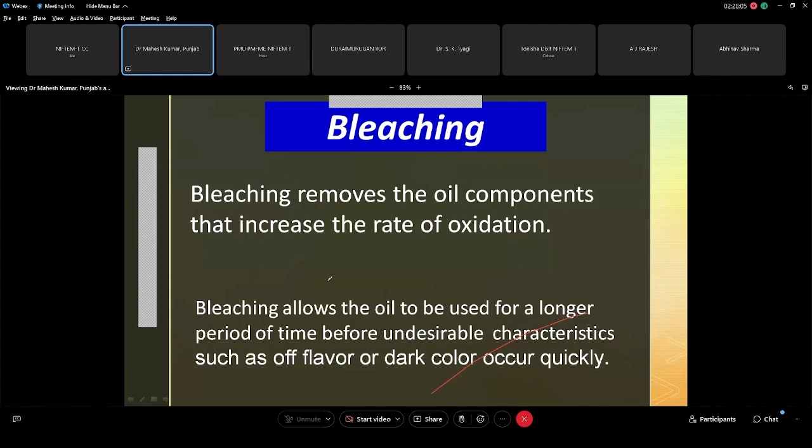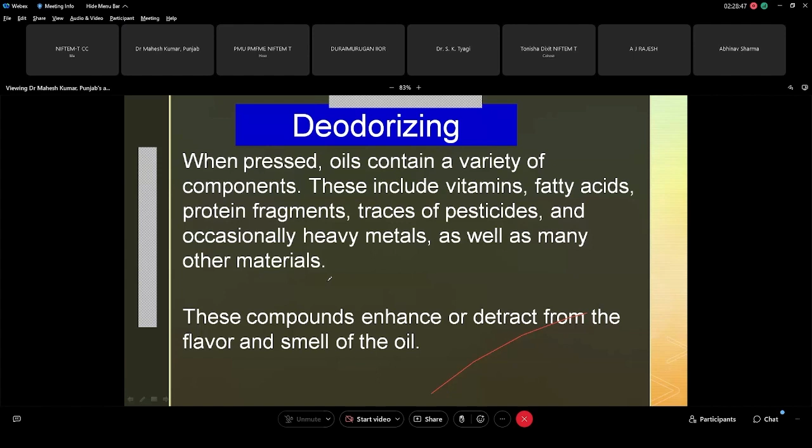Next operation is deodorizing. So the pressed oil contains a variety of components. These components may either add to or detract from the flavor or aroma of the oil.

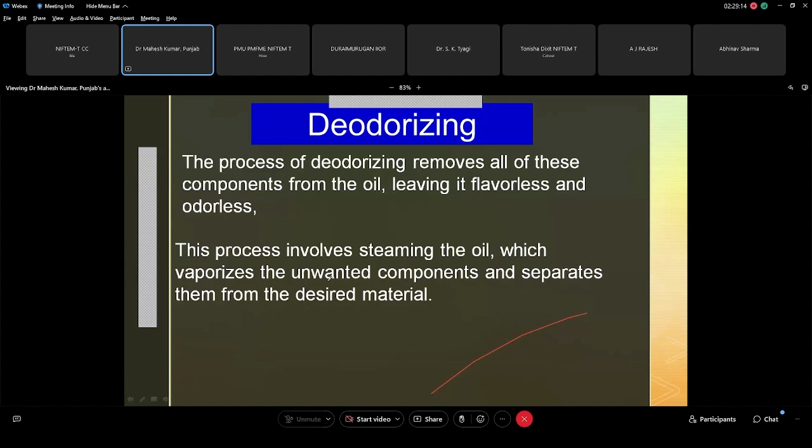So the process of deodorizing means we remove all the volatile components so that we leave it flavorless and odorless. For this, again, we have to use heat. The process involved is steaming the oil, which removes any unwanted compounds and separates them out in the form of vapors.

Commonly available oil expellers in Punjab usually make use of a 2 tons per day capacity, which is sufficiently high for an agro processing complex. For small production, units are set up so that the output is easily consumed and sold off to the nearby population.

One of the ways to designate the capacity is by the number of bolts. We usually say a 6-bolt oil expeller is better for a small scale operation, but otherwise we need to find out the barrel volume, power requirement, etc., and weight of the unit.

When we talk about the crushing oil expeller, it has to be a 3 passage design. This mechanical expelling unit is erected by having a number of strips placed together, and in between these strips we put spacers so that the oil which is expelled can drip out of that space.

It has got 3 sections: one is the feeding section, another is the pressing section, then there is the cake outgoing part. This is how the unit is designed, but before the oil is expressed, the temperature of the unit should be 60 degrees centigrade. This means before putting oil into the expeller, it should be run dry for a short period of time so that it attains that temperature for easy removal of the oil.

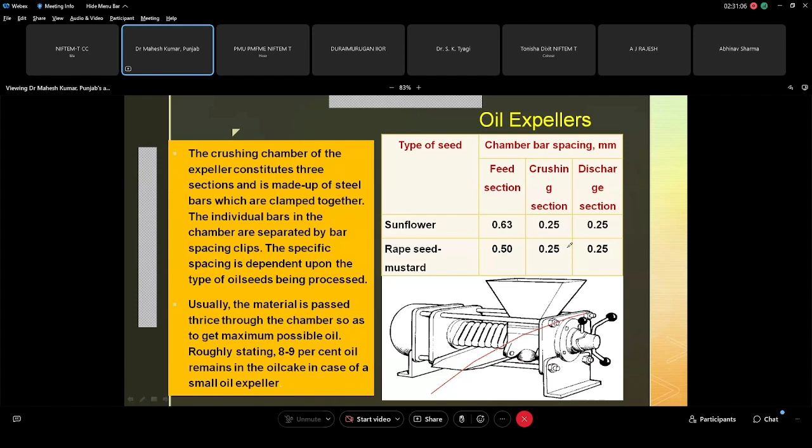The layout, the place where the oil expelling unit is placed, should be neat and clean. A few things we should always take care of: one is the door, which should be covered with a screen to prevent the movement of insect pests. Then there should be provision for washing, hand washing. There should also be a tank available so that any spilled material could be collected and dropped there. The cracks, etc. need to be avoided there.

Pipes should be smooth. Then there should be a trap for the flies, a gummed trap with strips, so that if an insect comes, it gets glued there. The unit should be very smooth, the floor area should be smooth, and there should be a counter for placing things. This is, in general, the sanitary hygienic regulation for how to handle things when installing a small capacity oil expelling unit.

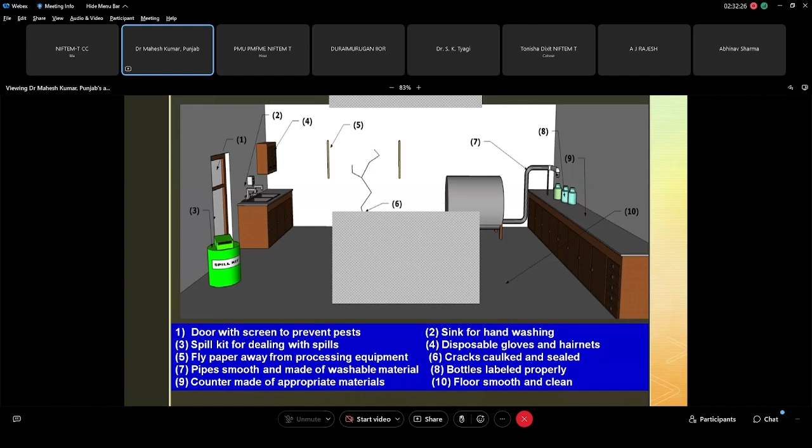We all talked about the PMFME scheme. It is for the formalization of micro scale food processing operations. The processing will definitely provide good opportunity to farmers and entrepreneurs to create value added products, and it is a must for our country, for people looking for minimally processed, highly nutritious food. But because the shelf life of products processed at small scale level is an issue, it should always be linked with the rural supply chain so that it gets consumed immediately before it deteriorates.

By establishing a farm gate, a rural supply chain within the country in the nearby vicinities, we can definitely go for small scale operation. In fact, the whole industrial development of the country is through small scale operations. Therefore, both types of units, enterprises, are required: one for farm gate processing at the village level, another for commercial purpose.

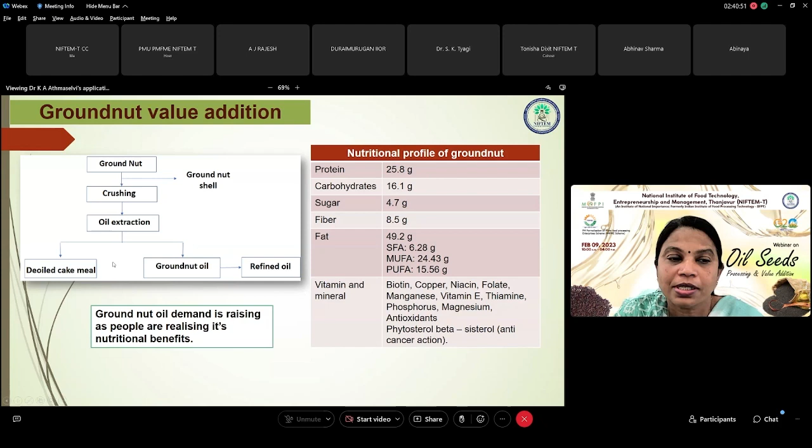Now let's look into the value addition of groundnut. The most popular and commercial product from groundnut is the roasted peanut. Nowadays we get roasted peanuts in various flavors - honey coated, spicy or pepper coated, and lemon and chili coated.

The other value addition that could be done to the groundnut is that it could be made into chikki, this kind of chikki sweets prepared from groundnut. And peanut butter is another commercial product that could be prepared using peanut, which is used in preparation of cake.

Peanut flour can be prepared from the peanut, which could be ground and made into flour, or the de-oiled cake could be made into flour. This flour has got lots of industrial application, like it could be used in preparation of cakes, cookies, bread.

In addition, actually the groundnut or the peanut added to the product enhances the flavor compounds. It gives a nutty flavor to the food product and enhances the sensory attribute of the product that is prepared using peanut or groundnut.

Another viable product that could be prepared from peanut is peanut milk. The peanut milk is as good as almond milk, and the milk for peanut or almond is in huge demand in the market because lots of people are looking for vegan products. So this milk has got lots of industrial applications - it could be used in preparation of curd or yogurt and in preparation of lots of desserts.

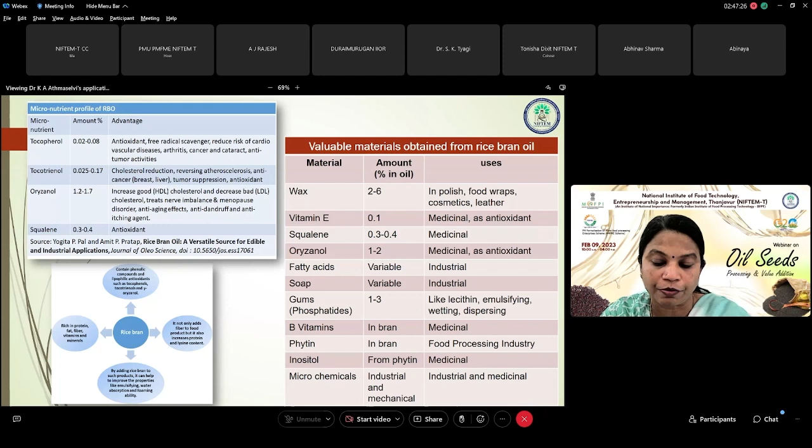Rice bran now has various applications. It could be used in bakery industries as a replacement to prepare various bakery products like cookies, muffins, and pastries. This is a small example where wheat flour is replaced with rice bran at a ratio of 10, 15, and 20%. This increased the protein content of the product to 3.43% when replaced with 20% bran, without altering the sensory attributes.

Rice bran also contains a good amount of protein, and the quality of this protein is superior to the protein present in other food-based products like peanuts and potato. This rice bran protein could be used as infant food, in the preparation of various gluten-free products, and also in the cosmetic industry.

Lecithin is one of the important products that could be separated from the gum in rice bran, and lecithin has lots of industrial application, including in the food industry. It is used as an emulsifier, a viscosity modifier, it helps increase shelf life, and is also used as a supplement.

Rice bran wax could be used in coating of fruits and vegetables. It is also used where the wax is coated onto meat and fish to enhance the shelf life of the product. Wax also has good application in cosmetic industries, where it could be used in preparation of body butter, lip balms, and lipsticks.

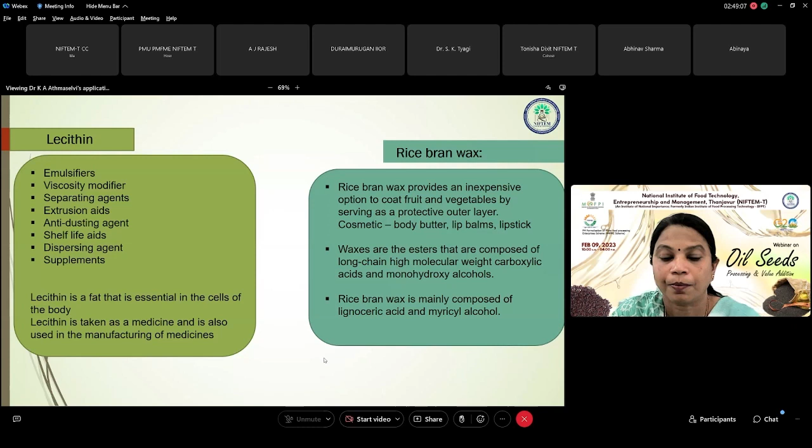Our next product is coconut. As you all know, coconut milk is equivalent to mother's milk. It contains a good amount of lauric acid, which has antiviral, antibacterial, and antifungal properties. Coconut is rich in fiber, iron, potassium, and protein. These are the health benefits of consuming coconut. Coconut or coconut milk is actually good for the brain, helping treat brain-related diseases like Alzheimer's, as it contains lauric acid.

These are the products that could be made out of coconut: coconut milk, coconut butter, coconut water, nectar, coconut cream, coconut sugar, and coconut shreds. Virgin coconut oil is another commercially high-value product that could be prepared from coconut, and coconut flour also has lots of industrial applications, which we'll discuss. Coconut milk is lactose-free and gluten-free, and is preferred by the vegan community.

Coconut milk could be used in preparation of a number of products. You can prepare separate coconut butter from the milk, and you can also make toasted coconut butter, where the coconut shred is toasted before separation of milk and butter. Coconut cream now has lots of industrial application in the ice cream industry and also in the bakery industry, and this cream can be separated from the milk.

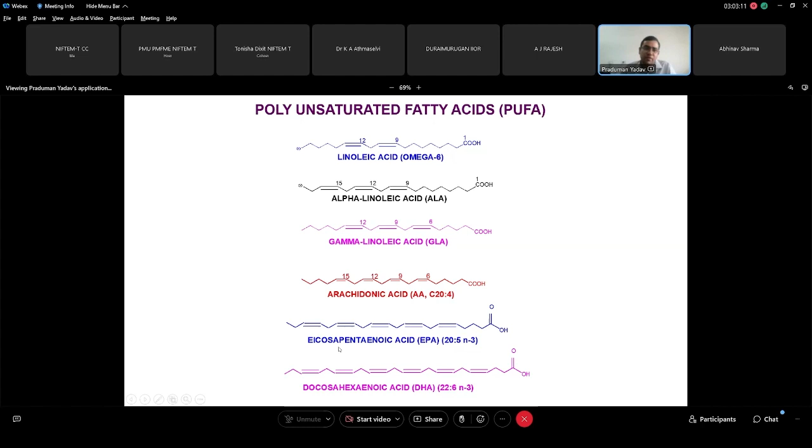These are the unsaturated fatty acids like linoleic, alpha linolenic, and gamma linoleic fatty acids. These are the common fatty acids, and these are not commonly found in these vegetable oils, like EPA and DHA, although these are essential.

So what is the importance of vegetable oil in our diet? As we know, this is an integral part of our diet, from curry making to puri making, vada, dosa - everywhere we use these oils only, and these are essential sources of essential fatty acids also. Apart from that, they have some regulatory functions for brain cell metabolic regulations and hormone and prostaglandin control also. And I have already discussed the taste, palatability, flavor, and mouth feel they give to our body.

And why are these essential? Because our body cannot synthesize some of the fatty acids, so we have to take them from other sources, like unsaturated fatty acids - linoleic and linolenic acids. So we are taking these from oils only. EPA and DHA are conditionally essential, because some people cannot synthesize or absorb ALA and linoleic acid properly. Then directly we have to give DHA and GLA. These are the importance of these essential fatty acids.

I will not go into detail on why these are essential - suppose this is alpha linolenic acid, an essential fatty acid, but in some people these enzymes are not present, so directly we have to give either DHA or EPA.

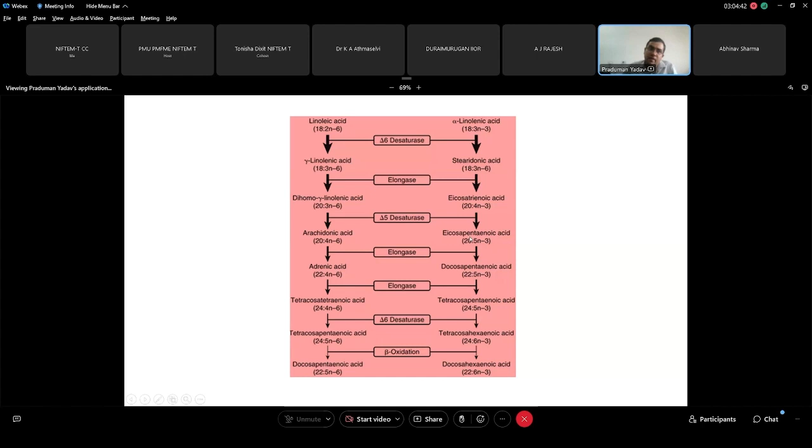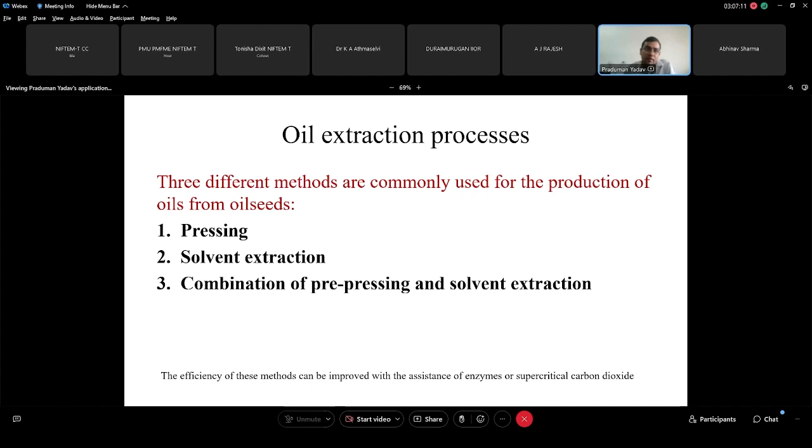First, this pressing method - oil extraction from pressing methods means the virgin oil, the Codex standard. According to that, virgin oils are obtained without altering the nature of oil by mechanical procedures, for example expelling or pressing. Heat application should not be there, and they may be purified only by water washing, settling, filtering, and centrifugation. No additives are permitted in this virgin oil.

But according to the German standards, the virgin oil is reserved for oils obtained in native or raw form, no heat treatment at all, only pressing of untreated raw material by screw press or other mechanical extraction, and purification of resulting oils by sedimentation, centrifugation, or filtration.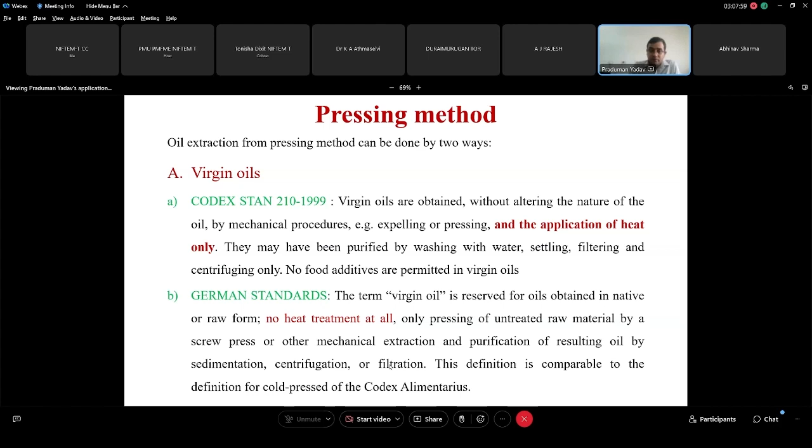The cold press oils, according to Codex standards, are obtained without altering the oil by mechanical procedures only, expelling or pressing, without application of heat. Virgin oils of the German standards and cold press oils of the Codex standards have the same guidelines - they may have been purified by washing with water, settling, filtering, and centrifugation. No food additives are permitted in cold press oil.

In contrast to Codex Alimentarius, cold press oil in the German guidelines refers only to the extraction process - no application of heat in this step. Therefore, cold press oils can be processed from roasted seeds, or use of hot water and steam is allowed in case of Codex Alimentarius for cold pressing, but such treatments has to be indicated on the product label. It can be concluded that virgin oils are also cold pressed, but cold pressed oils are not stringently virgin oils.

In the European Commission guidelines, they have clearly mentioned that virgin or extra virgin olive oil should be extracted below 27-degree temperature from the first mechanical pressing of olive paste by traditional extraction system using hydraulic press. So cold extraction can be used for virgin olive oil or extra virgin olive oil obtained at temperature 27 degrees by percolation or centrifugation of the olive paste. Such criteria in India have not been established till now, so we are following those only.

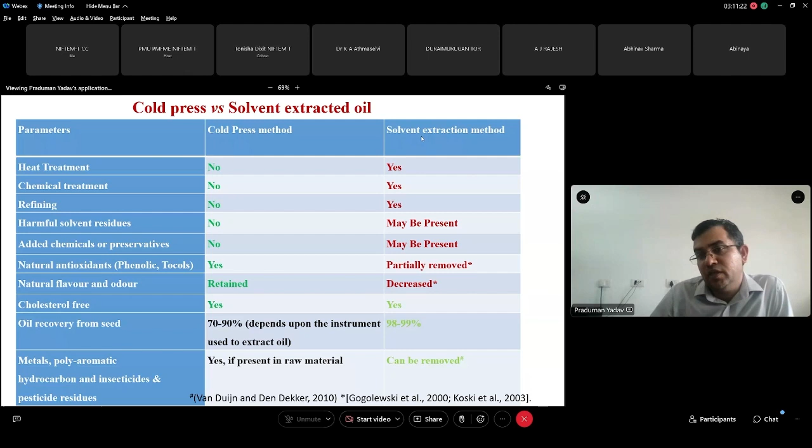Oil recovery is the major concern - in case of cold press methods, oil recovery is less; in case of solvent methods, oil recovery is very high. The major disadvantage of cold press method is that metals, polyaromatic hydrocarbon compounds, insecticides, and pesticide residues might be present in the cold press oils, but these things are totally removed in case of solvent extraction methods.

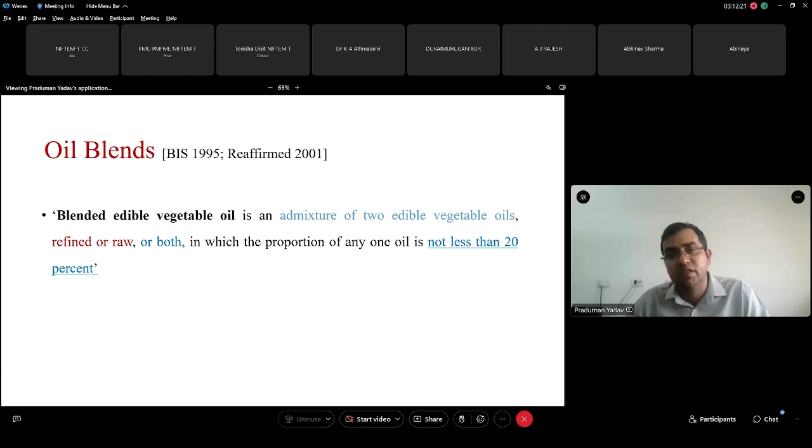So what is oil blending in India? Blended vegetable oils is an admixture of two edible vegetable oils, refined or raw or both, in which the proportion of any oil is not less than 20%. This means we can add in a ratio of 20-80, 30-70, 40-60, or 50-50. But that one oil should not be less than 20%.

There are different types of blends: type 1, type 2, type 3. Type 1 is an admixture of any two refined edible oils, where one oil may be refined solvent-extracted rice bran oil. Type 2 blend oil is an admixture of any one raw edible oil and one refined edible oil, where one oil may be refined solvent-extracted rice bran oil. Type 3 is an admixture of any two edible grade expressed raw edible oils, except rice bran oil.

So what are the admixtures with other oils and adulterants? This means the blended vegetable oils shall be free from argemone oil, hydrocyanic acid, mineral oil, other non-edible oils, and adulterants like kusum, castor, neem oil, karanja oil, animal fat, and tricresyl phosphate. These are in the guidelines only.

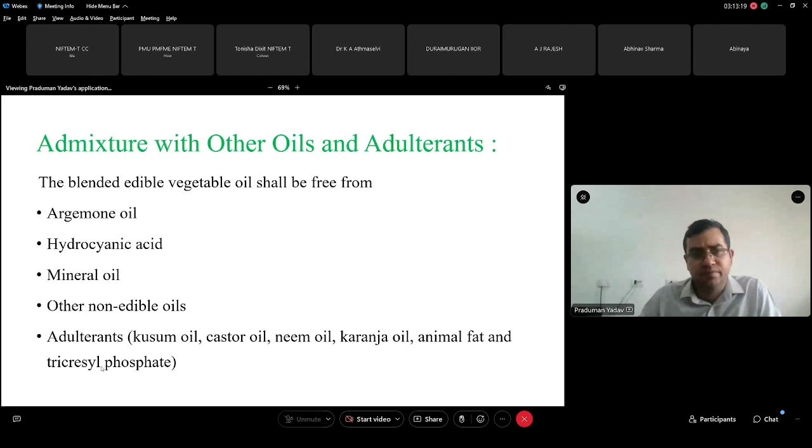These are the FSSAI guidelines for packaging. Blended oil should not be sold in loose form. It should be sold in packaging weighing not more than 15 liters. The container with the blended vegetable oil shall be tamper-proof. It shall also not be sold under the common or generic name, but these things should be there: blended edible vegetable oil.

The sealed package shall be sold or offered for sale only under AgMark certification mark. FSSAI has amended the word to be used for the weight of the blended vegetable oil package. Instead of 15 liters, the packaging of blended vegetable oils will now weigh not more than 15 kg.

So we did a market survey about two years back, and we collected information about the major oil brands and their composition. These are available in supermarkets, different edible oils. We collected this data and according to their label claims, we noted their fatty acid composition - saturated, monounsaturated, and polyunsaturated fatty acids, and trans fats and omega-3 also.

For single oils, meaning not blended, we got: olive 14 oils, sunflower 12 major brands - other brands might be there but these are the major ones present in supermarkets - rice bran 9, canola and mustard 5 brands each, groundnut 4, palm oil 4, sesame 3, coconut 3, soybean 1, and safflower 1 brand. These number of brands were there in the supermarket, and we checked their fatty acid profile.

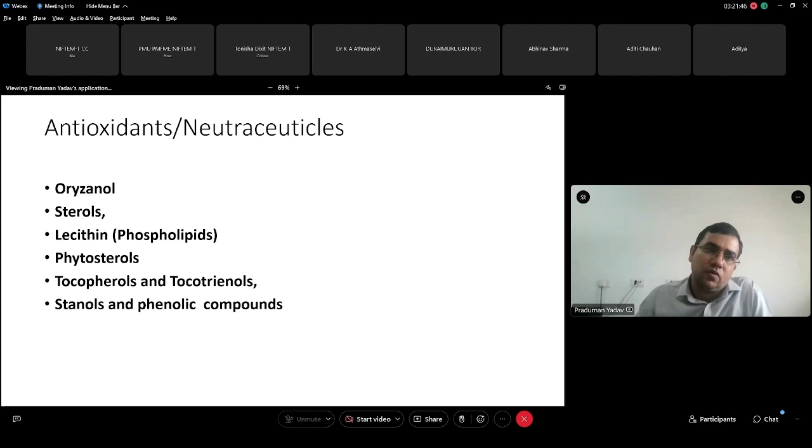If we take saturated fats, monounsaturated fats, polyunsaturated fats, and high linolenic acid in polyunsaturated fats, the oxidation rate differs. If you take only monounsaturated fats, oxidation will be very less; with saturated fats, oxidation will be very less too. Monounsaturated fats will increase it slightly, but with polyunsaturated fats, oxidation will increase drastically, and if linolenic acid is present, the oxidation rate will be very high.

To reduce this oxidation rate, we have to add antioxidants. These graphs show rancidity with no antioxidants versus with antioxidants in fresh oil. With no antioxidant, the oil becomes rancid in no time. If we add antioxidants, it increases the time for rancidity and keeps the oil fresh, increasing the storage time of the oil. So it is helpful for storing, and there are health benefits also.

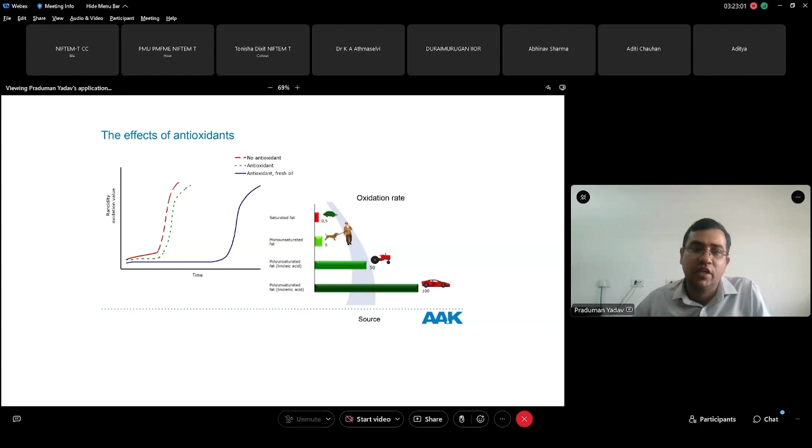We'll be moving on to the next technical talk on oilseed processing industry insight and experience sharing.

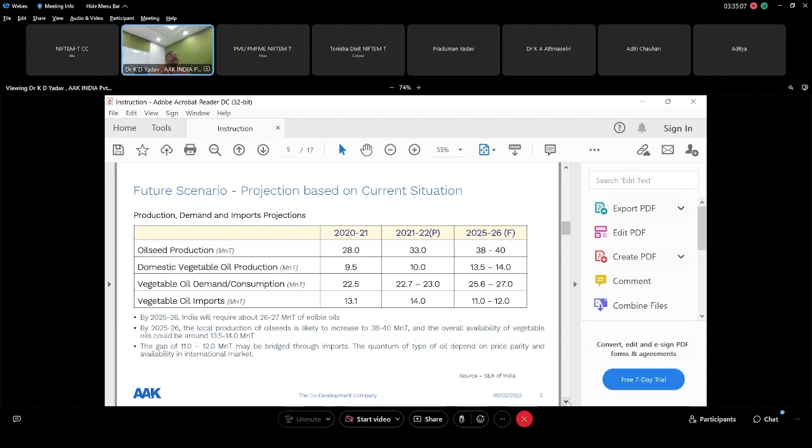Along with productivity, processing of edible oils is most important - particularly how to modernize our ancient or old methods of extraction. As previous speakers emphasized, more focus has to be on pre-cleaning and pre-treatment of seeds, so that we get better quality oil and oil yield, and also better value addition for the meal we get, rather than just exporting it or utilizing it for cattle feed.

We all know India as a country, we have protein malnutrition as still an issue, and we need to ensure that all these edible oil seeds, majority of them, after oil is extracted, contain almost 40 to 50% protein in them, and how to extract this in the most effective and efficient way, so that we get value added products.

I'm sure Dr. Sanjeev Kumar and even I have been in touch with CIPHET Ludhiana. The team is doing excellent work in the value addition part, I must say. I had the opportunity to interview Dr. Sanjeev and Dr. D.N. Yadav last year, and they're doing a wonderful job towards getting protein concentrate or protein isolate, which are going to change the overall economy of the business we are into.

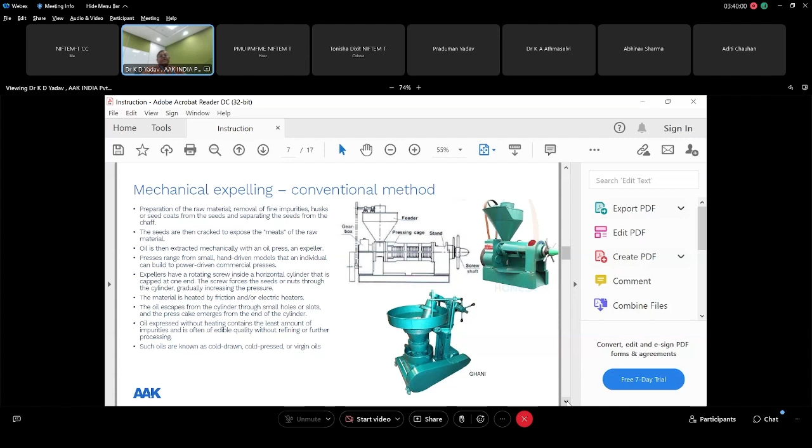And most important in this is how to take care of contaminants. There are a lot of opportunities for export, but how are we going to do it? When we want to export oils, we need to match global standards. So if India wants to implement this local-to-global concept, we need to upgrade our systems, both in processing, preparation of the seeds, and contaminant management is going to be very, very important.

We all know certain contaminants like MOSH and MOAH come from the lubricant or plastic that we use. So the system has to be designed right from acceptance of the seed to processing of it. A total risk mitigation plan to take care of these food contaminants is going to be of importance.

And there is an opportunity, because in India we have palm, which is a saturated oil. We have coconut oil, which is a very good oil in spite of having the highest saturation, but the quality of saturated fatty acids is really good. And now it's proven beyond doubt that coconut oil is a good oil.

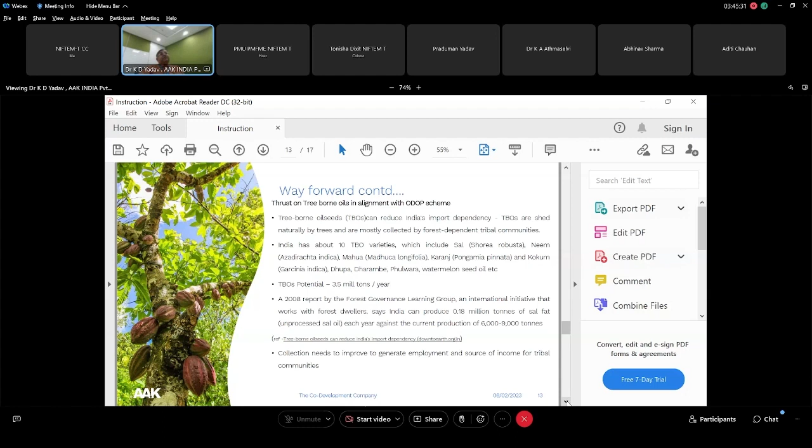So we need to focus on these tree-borne seed oils also, which are nothing but going to be cocoa butter equivalent or cocoa butter improver kind of properties, and the tribals who are involved into it can get better earning. We can improve their livelihood, and overall collection of these will go up if they get better remuneration and value addition.

So chocolate consumption, as we all know, in India is quite low. It is 200-250 grams as against 1 kg global average. So there is a lot of opportunity to focus on these kinds of oils also, apart from the traditional regular oils that we have.

Regular oils also, like we have got a huge opportunity - virgin cold pressed oils, our colleagues and friends enumerated on. So sesame, groundnut, mustard, which is high erucic rapeseed oil. In Europe, it has got less acceptance because of the high erucic acid.

But frankly, if you ask me as a nutrition scientist, it is one of the best edible oils, nutritionally balanced, that we have. And many of you as formulators know mustard oil can be used even in weight reduction formulations or recipes, because of its very high content of erucic acid, or on further hydrogenation it becomes behenic acid. By virtue of being a long chain fatty acid, its digestibility is relatively low. So you can enjoy the taste of food using these oils and still not have much problem of weight gain.